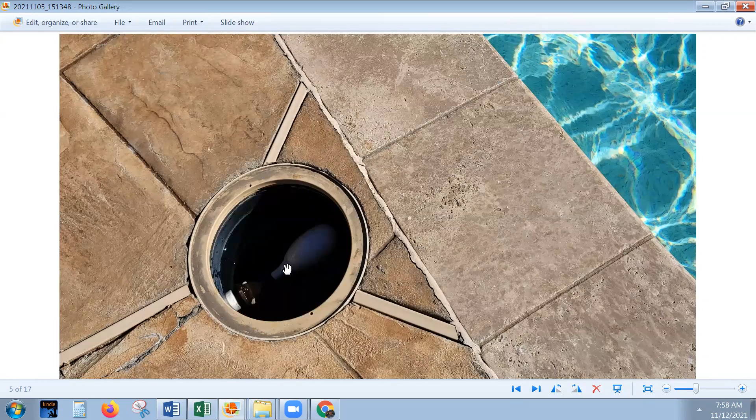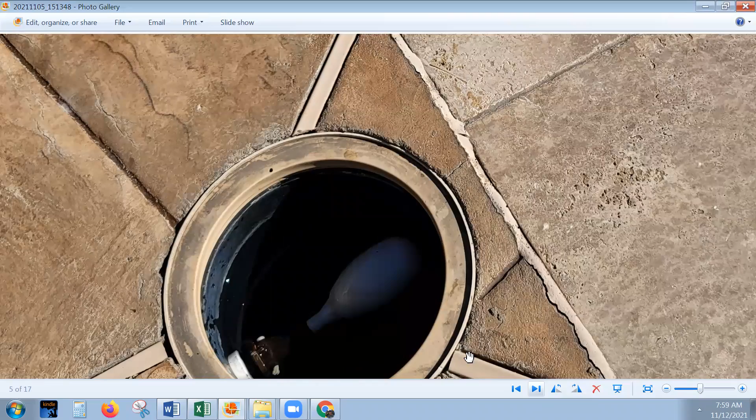The very first thing is this is in the wrong place. Look at this float mechanism, which has that arm that goes up and down maybe so many degrees. You know how it goes. You can bend them down, you can lift them up a little bit to manipulate the water level in the pool. But when it comes to the basin, this is a huge mistake. I mean, it's an enormous mistake, and I'll come back to that.

One of the main problems here with the stone is that the stone was actually adhered to the wall using a mesh-backed travertine. And you may say, well, we never use mesh-backed travertine, so we will never have this problem. Yeah, I don't think so. Let me mention this to you. If you've ever used mesh-backed glass tile, you have used mesh-backed materials.

So let's take a look at this video, and it's going to swing around wildly. So just be prepared for a bit of disorientation.

We see the water sort of flowing over intermittently. And here we go. This is a really serious problem.

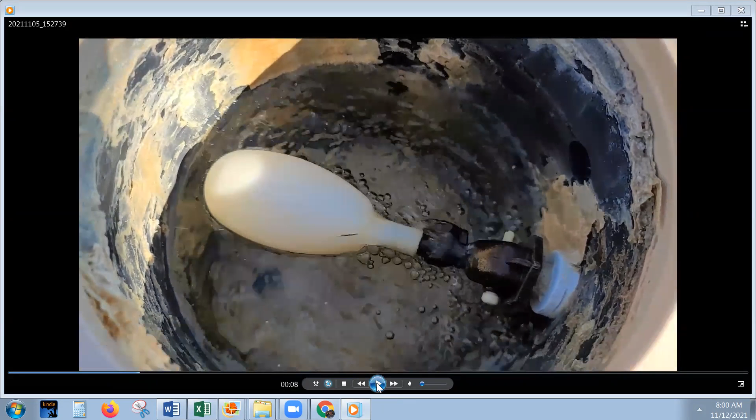Now look how low the water is and look where the float mechanism is. So if you want to lower the water, you have to lower the float, but that's not going to help here. This water level device is in the wrong location. Wrong, 100% wrong. Now it looks as though they've come in here and patched something up. This looks as if it's had some work done on it.

So let's go back to the problem. Oh, well, I'm pointing this out. This running at that extent means that it probably runs 24/7. Let me talk about that in a moment, but let's identify the other problem, the problem I was called out to identify.

Okay, here we go. This is the mesh-backed stone. There are two negative edges here, one the pool and then the reverse negative edge up the top. This also is not the detail I would do on a negative edge. This is too thin, the stone. You can't grind it later if something goes wrong. And the angle is really poor as well. I mean, it's supposed to run down the face, which is only asking for more problems unless the material was the right material in the first place.

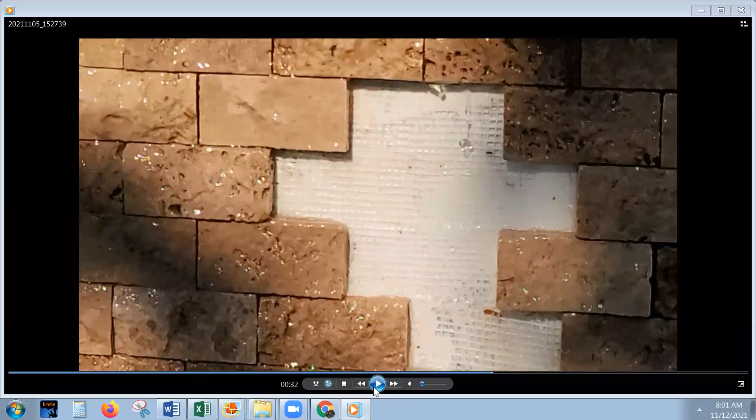There we go. It's another huge problem there, but let's come back to the cause. So this is the cause, and what happens is the mesh is acting as a barrier. The stone gets wet, the glue gets wet behind it. This is not a grouted stone, should never have been installed under such conditions, and it's the wrong material. So obviously it did what the material would do under the circumstances.

So let's go back to the automatic water leveling device. Looks as if they used a white thin set there. I don't even know if he waterproofed that wall, by the way. I'm not going to get into that detail, but let's come back to the autofill. So here we go. This is a really serious problem. So let's talk about the autofill.

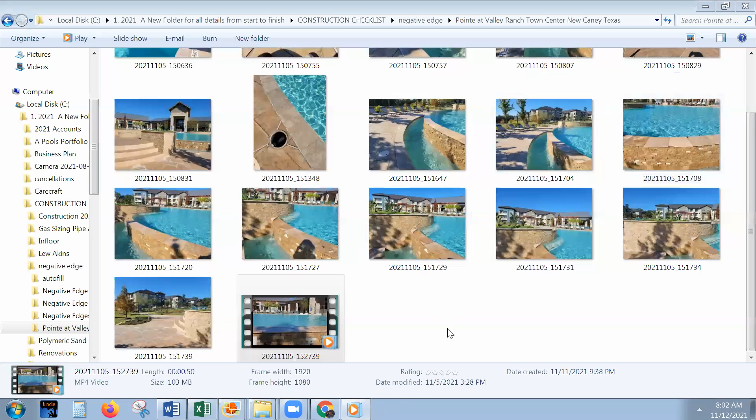So when I spoke to Lew Akins, and I met him a couple of years ago, he talked about a problem that he'd had with a negative edge pool. A homeowner contacted him; he's an industry expert, I believe he's semi-retired now. At the time, she had a water bill that was completely outrageous. Before her negative edge pool was built, her water bill was moderate, she knew what it was, it was fairly consistent. And then all of a sudden, it went up from maybe $100 or less to $600 per month. So she blamed it on the pool builder.

They didn't know what was going on, they didn't know why this was happening. And so Lew Akins was called out. The first thing he did was, when he looked at the pool project, he identified that the autofill was in the wrong location and up too high. So let me show you what I mean by that.

But before I leave this area, look at the water level here, and also observe that there are absolutely no bathers in this pool. High water level in the basin, no bathers in the pool, and no way of dropping that water level down much further, because, big mistake, huge mistake, the skimmer is in the basin, or two, and there are skimmers in the pool. But because this builder didn't know what he was doing, he just said, well, better to be safe than sorry.

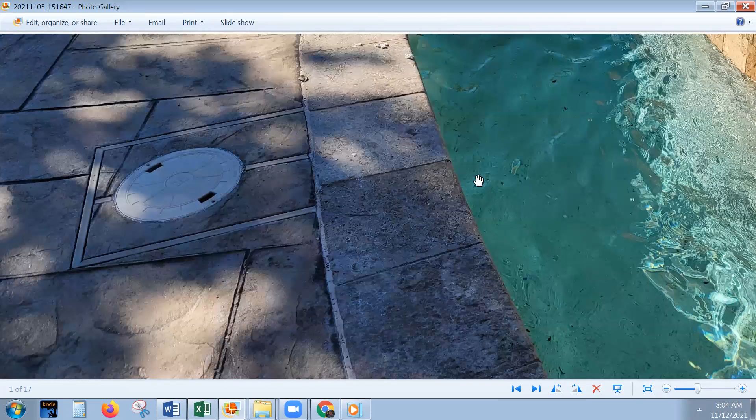Let's put a couple of skimmers in the basin. Another thing that's happening here, you'll look in here, this is eroding. The reason it's eroding is there's definitely, as we know in the pool industry, these things leak, and this has definitely a leak. You can see by the way the concrete is eroding. Not the subject for discussion right now. I'm only focused on a few things, but just look at the height of that basin and ask yourself what's going to happen when about 50 bathers get into that pool and start swimming and splashing and jumping around.

So now let's go to another pool. If you look at this pool, this is one that I built on Lake Conroe, and it was a very, very difficult job. I'll come back to that in a moment. But look at the basin, and what you'll notice is that the water level is much, much lower than what we had just seen. This is the first row of 6, the second row of 6, and the water is in the third row of 6. So 6 inches, obviously.

Look at another thing here too. The water sheets off. It doesn't roll down the tile, but we use tile. We had better adhesion. This is ceramic tile, 6x6, better adhesion onto the waterproof surface.

Another very, very brief point about negative edge pools is that you need to have the basin pump on the same level as the basin. What they did here is they put some landscaping around it. This pump was extremely quiet. In fact, we had 2 pumps there, but keep that in mind. With these elevations here, a pump at the higher level for the basin would have had a serious priming problem.

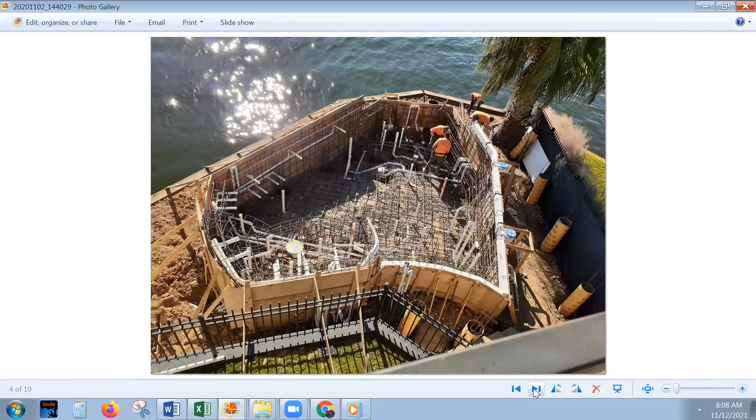So let's go into this project with more depth. Very difficult conditions, extremely hard to get to place. We had to come in via barges on the dig and to remove the soil. And I can tell you that the soil was 50 to 52 cubic yards max to get it out of that location. So we raised the pool for obvious reasons.

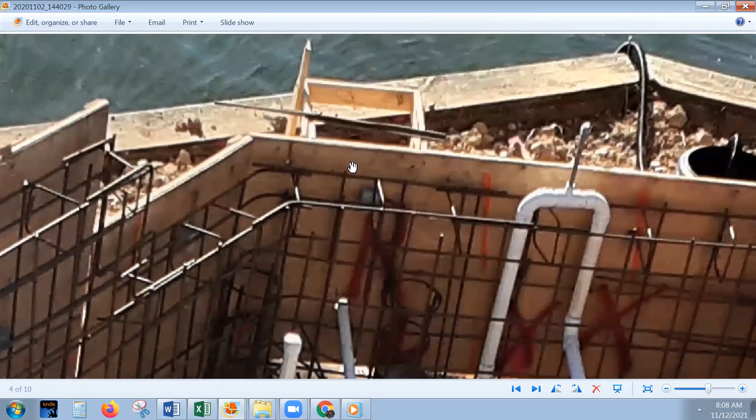Now, if we look at this project here, remember, just regard the fact that the pool is sitting up out of the ground. It's just the interior construction details would be the same regardless. So if you recall, the other basin had its autofill up the top, didn't it? That container was up the top. Well, not here. And you might wonder how this is possible.

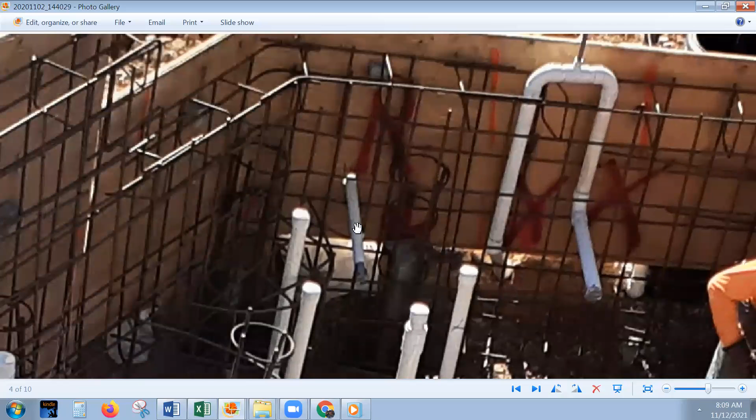This is the actual autofill line, whereas the other autofill line was up much higher. So the concept here is that float mechanism can be adjusted up or down from this. And this is around 12 to 14 inches above the finished floor level. This is another thing here, this is an overflow line. And I'll come back to that with a vacuum break here, so you don't have this ugly pipe sticking out of the top, but not the subject right now.

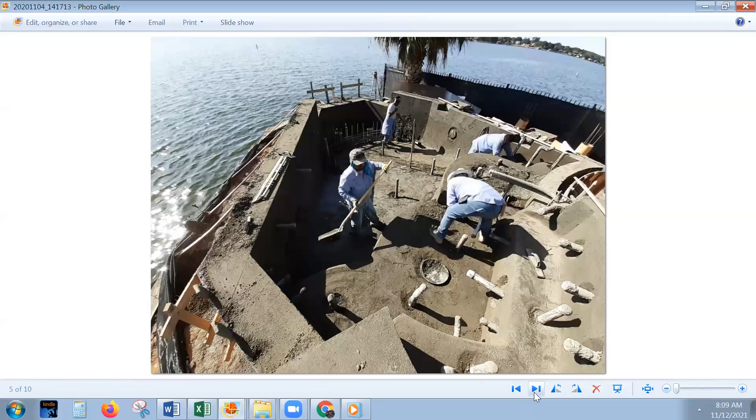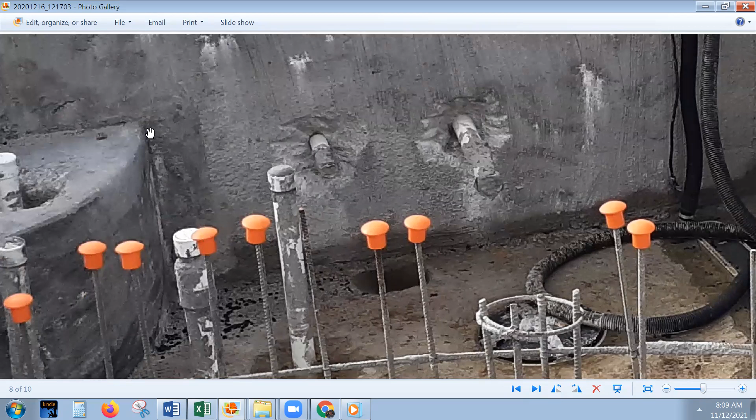So when we did this project, you'll see here again, this is the autofill level right down here below the bench height, and this is the overflow line. But that float can be adjusted down here and not way up here. Big difference between the two. So, I do not have a skimmer whatsoever in the basin. The skimmers are actually where they should be, in the pool.

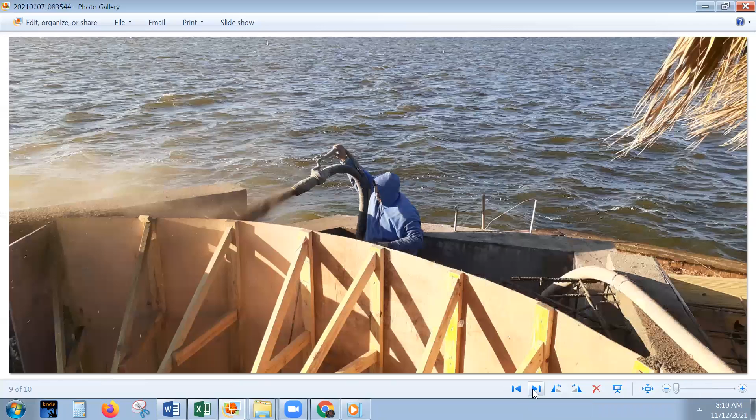So, okay, so this is what we have. Gunite, this was another shoot. We actually did this on 2 separate occasions. We waterproofed using a cementitious waterproof, and then the guys did another waterproof coat. But look at the tiles, 4 rows. We didn't just do the regular 2. Why 4 rows? Well, the reason is, look, I have my NPT book here. Oh no, that's the box of the material.

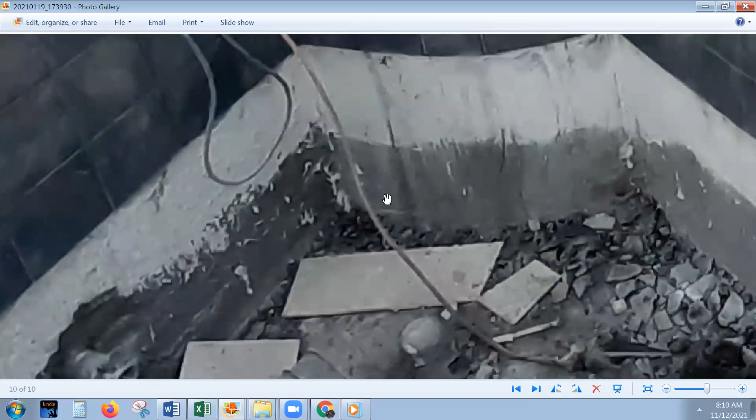So why 4 rows? Because the basin water fluctuates tremendously. Look at this, so we're very close to the floor here, maybe 12, 18, looks like about 18 inches or so to the floor level.

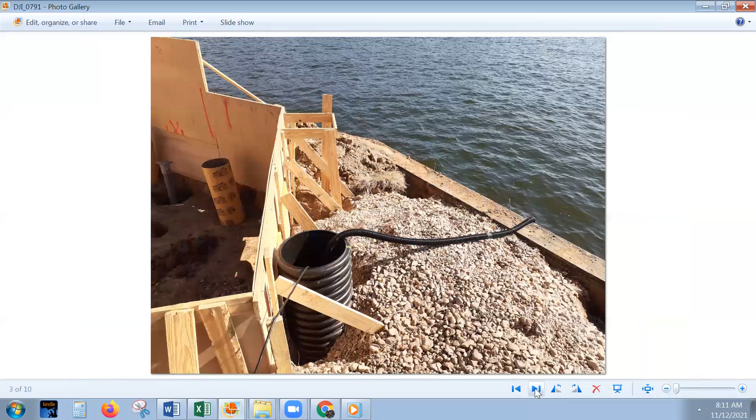So let's look on the outside, see if we can glean anything else. Again, the basin is a pretty good size, decent depth. It allows for fluctuations of bathers, but we definitely will not see 50 people in that pool, typically not. And the autofill line comes down here, goes back up to the upper level. And we actually put the mechanism, the float, inside the basin, which most builders would say that's not a really good idea. Well, choose wherever you want to put it. That's where we put it. And then determine the right elevation for the basin.

So let's go into another project.

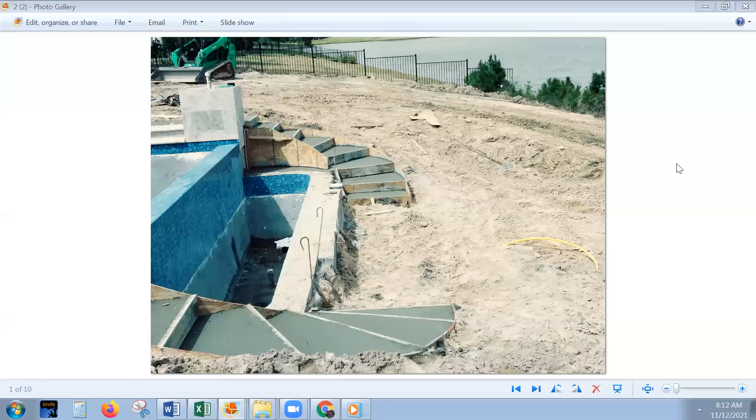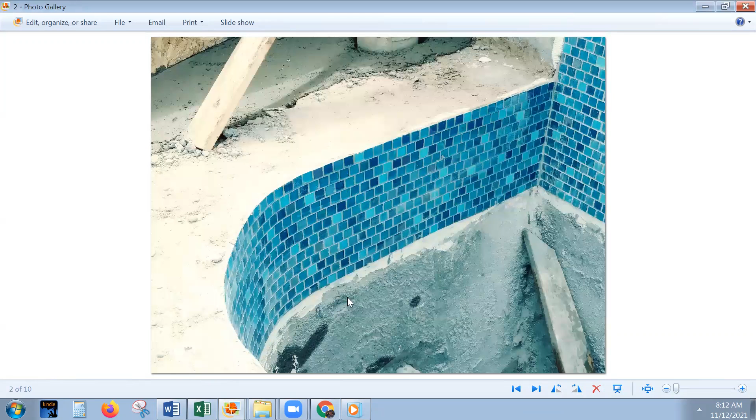So this builder didn't know what he was doing. He made a few guesses, and that's understandable. He has around 14 inches here, which is a mistake because the fluctuations in the basin will be tremendous.

He's setting his autofill, and I think he's setting that autofill up too high. I don't know exactly, but he's got a few issues that will occur. He's going to have wicking here, which is going to wick around to the side and create an issue over here. It also looks like this concrete is a perfect area for water to settle. So not a very good layout there.

He's used glass tile, which I would just about bet has mesh behind it. And one other thing here is waterproofing is an issue.

This is the gunite. You can see he has not prepared the gunite. Look at these holes here. These are just going to be great for water to go through. I know we get plaster on there, but plaster is not impervious material.

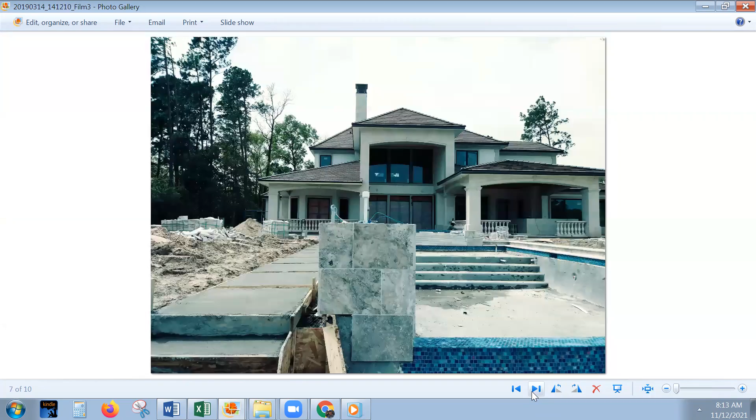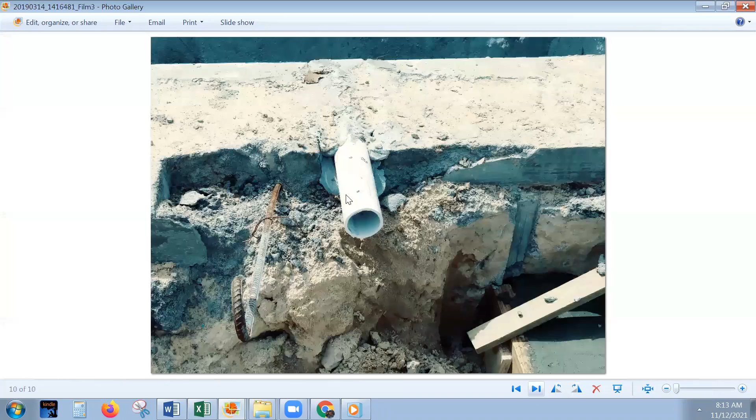And the other thing we see here, which is a mistake, this is the overflow line. So imagine water coming out of here, and then it's going to run down this area and flow down the hill. Not the right way to build a negative edge basin.

But at least he does not have the skimmers in there. And again, his depth with the tile is completely incorrect. It's a long edge, and this basin is not big enough for that long edge of the pool, 15 to 16 feet long. So let's go back to our original.

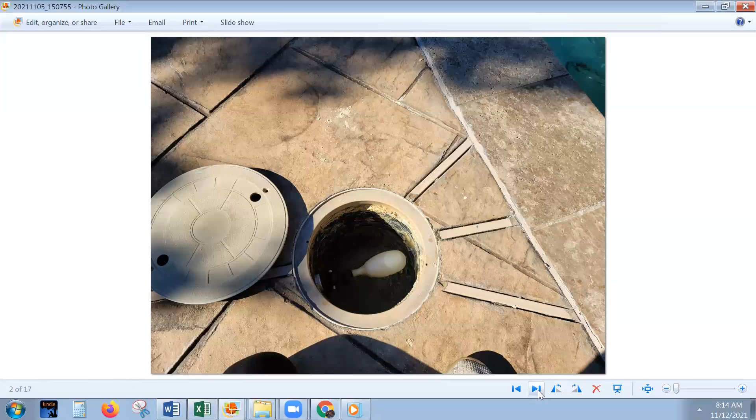So a couple of things here. Is the basin for this project large enough? Is the autofill set at the right elevation? No, no. Is the material the correct material? No. Is the sheeting correct? No. I would have probably changed the angle of this wall.

Will the water wick to the side? It was wicking off to the side. They came in and put in a little bit of this ugly looking thing here to stop it from wicking over to the side.

Did they waterproof the exterior and interior of this wall, which is absolutely critical? I would say not, given what I've seen here. Was the autofill installed at the right elevation? No.

What about the overflow line? I doubt it. I don't know where the overflow line is. I never saw one. But if it's overflowing, it's got to be coming out here, can't go out the pool, and then it's got to go out some way, maybe over the top, maybe the overflow line is somewhere here going down toward the lake.

The water line tile, is it deep enough in the basin? No way, Jose. And the skimmers, are they in the pool? Well, they are, but there are also some in the basin. And has the builder calculated his hydraulics properly? Well, I think we can come to that conclusion fairly quickly.

So now that you've seen the other basin, now that you understand a few extra details about negative edge pools, there is more to it. If you're planning to build a negative edge pool, you might want to contact me for more information, more educational tools you could look at. Also keep in mind, very important, it is a liability for any builder to build a pool, and it's more so a liability with a negative edge pool.

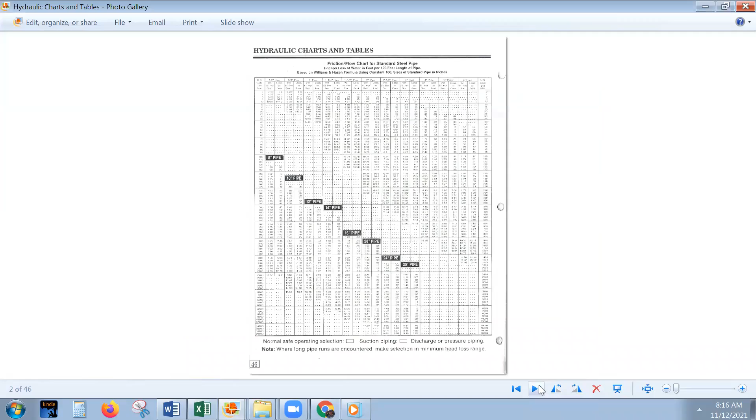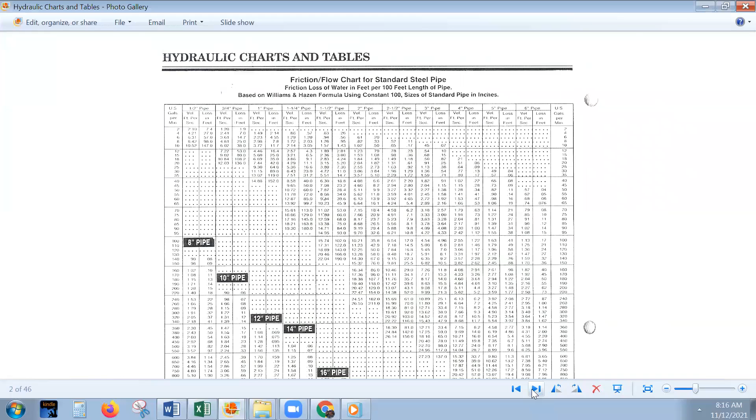So when I purchased the course from Lou Akins, this is material I was given. This is that frightening hydraulic chart and table that most builders will not review. He sent me an audio DVD and a bunch of photos, and also some details. These are really low resolution photos.

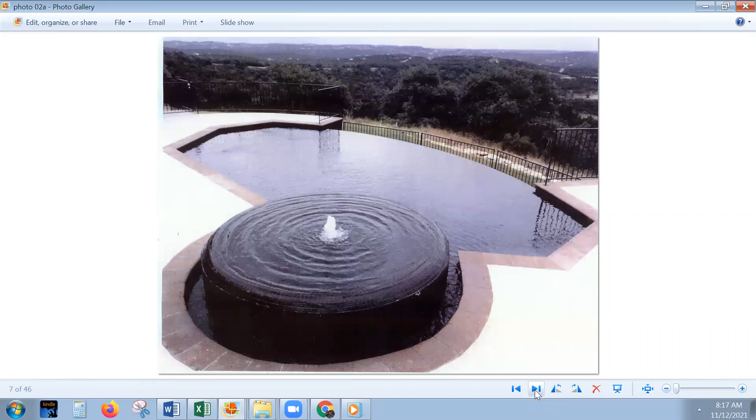Now, I contacted Lou this year in 2021 and asked, are you still selling that course? And he said no, he's not. I asked him if I could sell it, and he said I could do whatever I wanted, but he was not offering this course any longer. Extremely informational, and it really helped me a great deal in building a negative edge pool.

Also, I met with him and he discussed that problem I talked about with the builder, where he identified the problem and resolved the issue with the autofill. A little bit of demolition work, but it was done. So let's go into some of the very important details here, and we'll see different plan views and cross views.

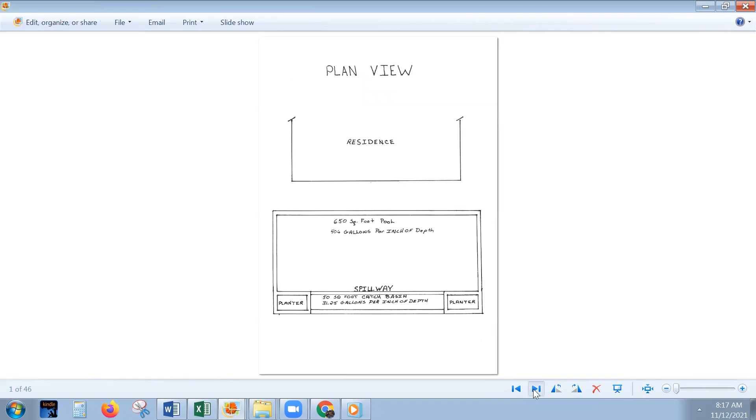I'm not going to get into this very much, but this is a really extremely important issue: the line of sight and the basin, and what's behind that negative edge pool. So we have some different angles and different details.

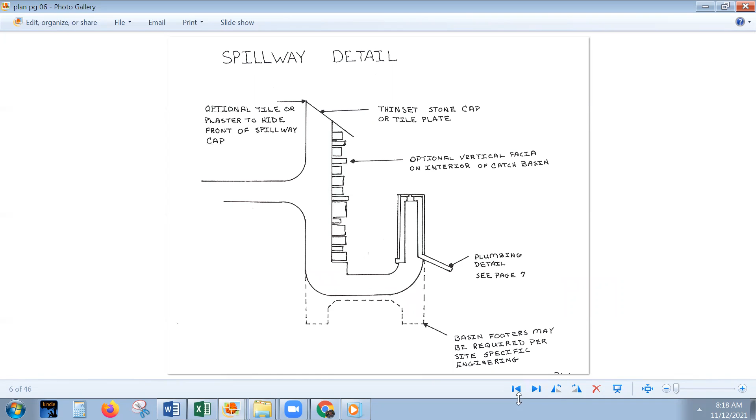This shows a cross section, but not quite the one I want. Shows the overflow, not quite what I want right now. I'm just going to cover some of the other details here. If I can find my little graph, let me see. There's quite a few, isn't there? You'll notice there's quite a bit in it, but it's okay, it's just a matter of getting acclimatized to the details.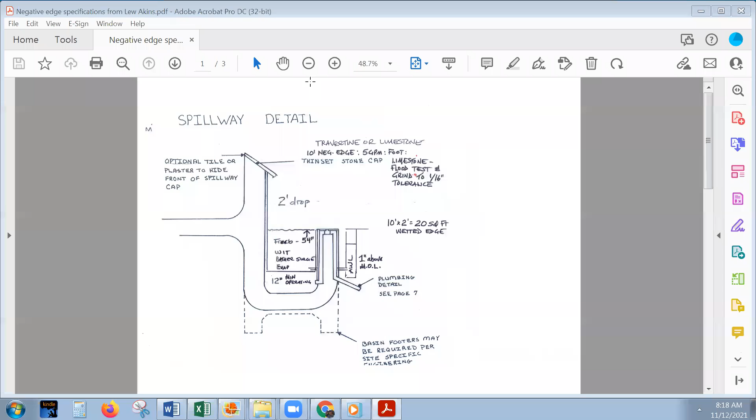So let's look at the main details. Here is a cross section of the basin. Minimum operating is 12 inches. You have to allow for evaporation, bather surge, WIT - water in transit - and then freeboarding.

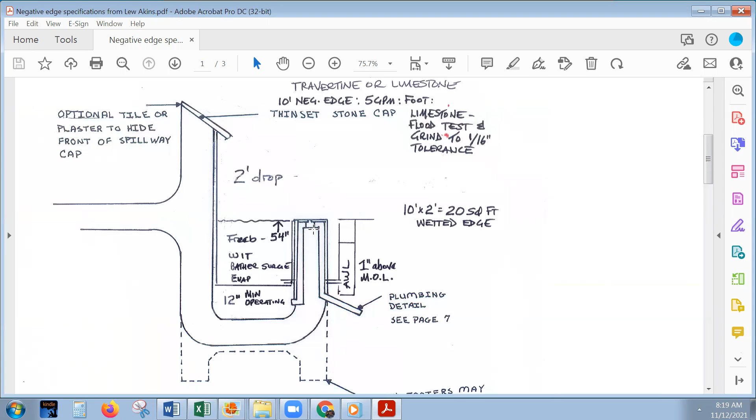So your freeboarding is that area between, once these calculations are done down here, it's that water fluctuation level until it gets to the top of the basin or the overflow or something. See, our overflow never kicked into effect until that water rose over sort of almost to the top of the coping. But here's the situation.

So we are supposed to have that autofill set low. You can see here, there's the autofill, there's the level here, and it's set low, so it's sunken down, isn't it? You can use different autofills, I just chose the one I wanted.

There's evaporation. Now keep in mind, when the pool evaporates 1 or 2 inches, that could mean 6 to 7, 8, 9, 10 inches in a basin, because your basin is going to refill the pool. Water's going to come out of here and go back into the pool when that evaporation hits. So if it loses half an inch or an inch, depending on the gallons in the pool, it could drop down many inches in the basin.

So you have to be prepared for that. Bather surge, I think it's 20 or 40 gallons per person that jumps in and starts splashing around. And then, of course, 10 or 20 of those, or in that commercial pool, there might be up to 100.

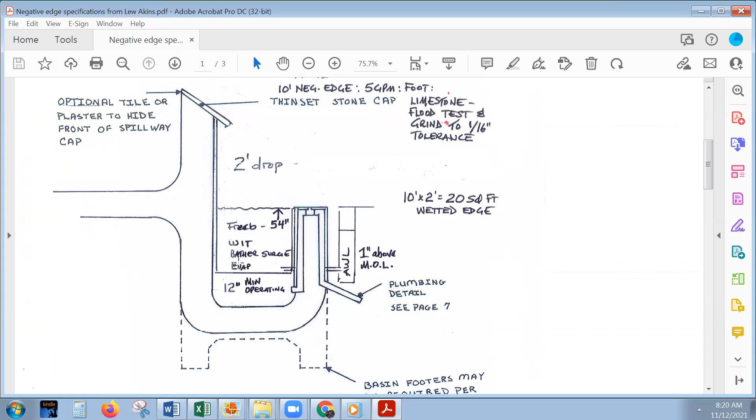Then there's water in transit. So this is off. Guess what? The water's in the basin, sitting around, waiting around, isn't it? So when the water's on, running through the pipes, it gets sucked out of the basin, so that level drops down. So these are just some of the concepts. And of course, there's a way to calculate for that and then add yourself a sort of protection layer, a little bit extra.

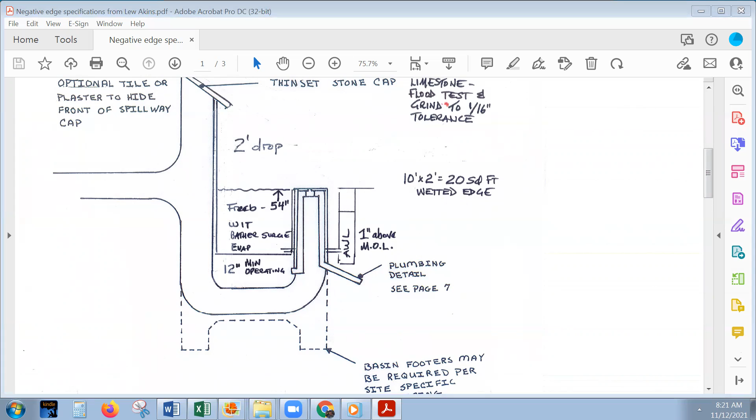So now let's go back to that pool and see if you've learned anything from this video. If you did not know about those concepts before, but you learned them in this video, then if you'd first seen this pool, you wouldn't have known the problems with undersizing this basin and what was going on at this stage. But now that you've seen some of the ideas behind sizing the basin up properly, let's go back to the basin and take a look at that water depth.

The autofill's in the wrong place. They've used the wrong material. And this pool now, that pool builder, if the apartment complex chooses, they will sue him to fix it. I mean, this is in the tens of thousands of dollars to fix this project. So whatever profit margin he thought he made, he will not make any money out of this project, and it will cost him a lot.

Whereas if you did a briefing on this, grasped some of the ideas, and then decided to educate yourself on how to build negative edge pools, you could actually make this a very successful project if you were to build this type of pool in the future.